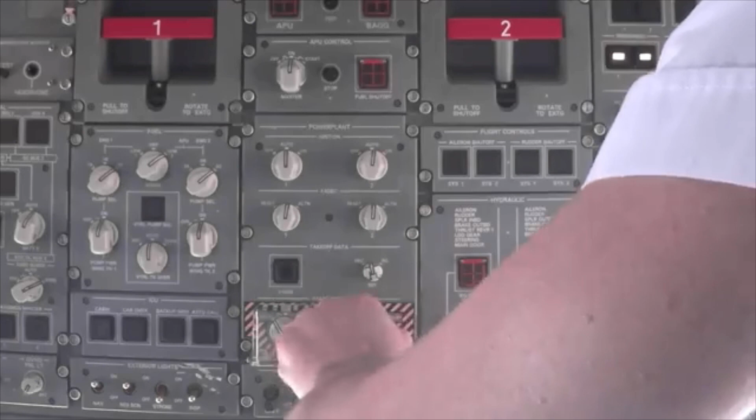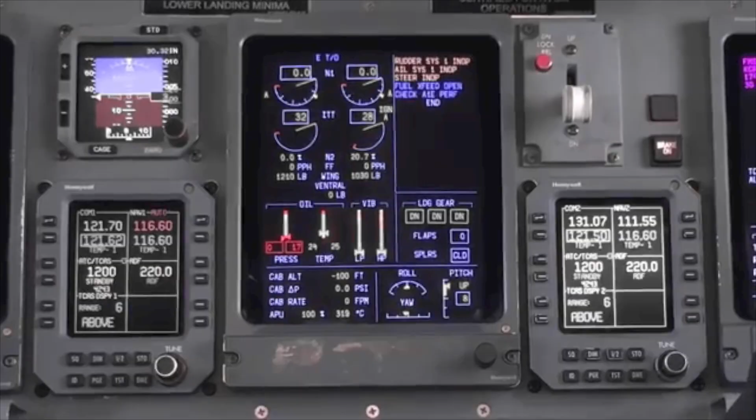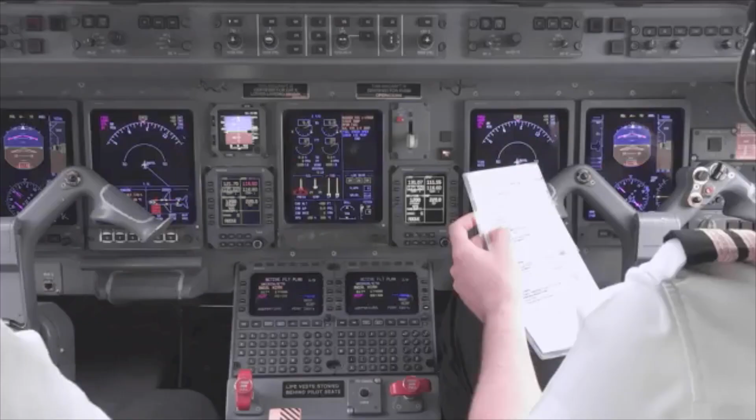Hey, even if you don't want to fly a jet for a career, it would be nice to start a jet at least once, and maybe push the throttle up. Jet engines are usually a lot easier to start than a prop, and the process is pretty simple. It comes down to lots of air under pressure, some fuel, and boom, you're lit.

The tough part is getting enough compressed air. To understand how a turbine engine starts, you should understand how it works. They run off a suck, squeeze, burn, blow principle.

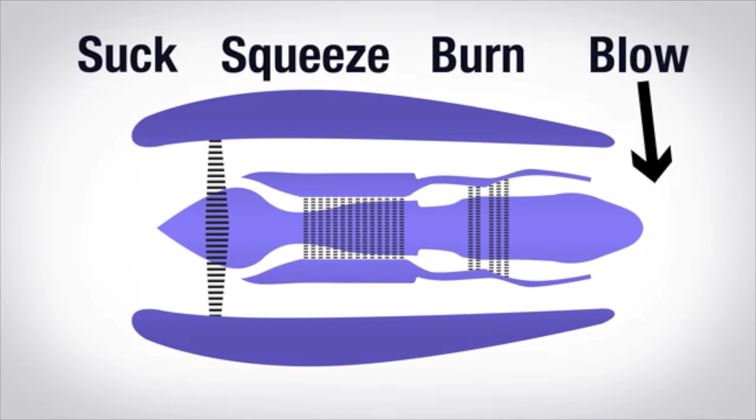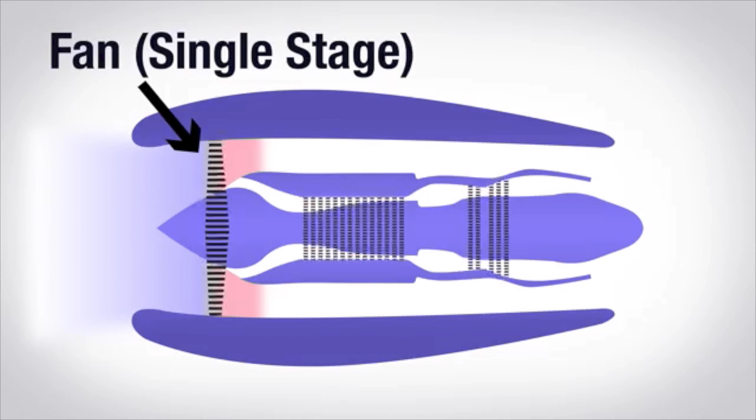Take this generic turbofan engine, like the one that powers the ERJ. It sucks air through the intake, and then it sends the air through a fan, compressing it. In the ERJ, the fan is a single stage, one row of blades. Then, most of the air goes around the engine. This is called bypass air. We use this for most of the engine's thrust and for cooling.

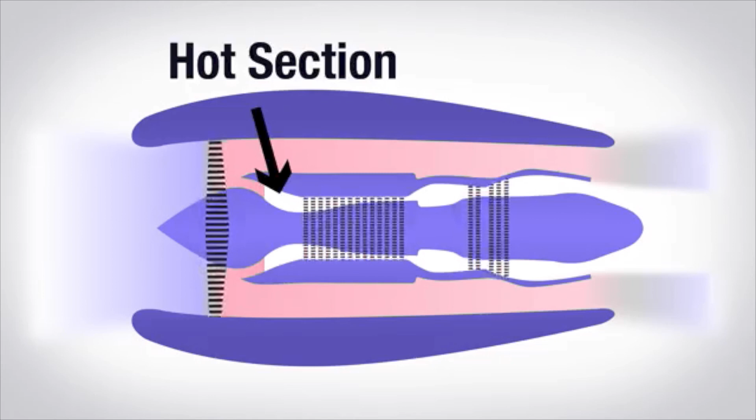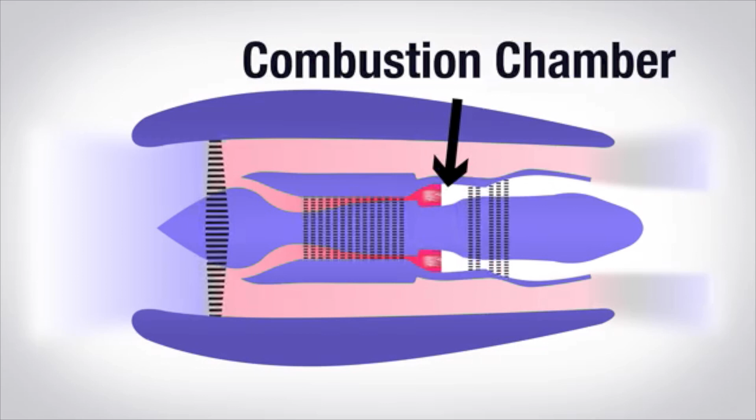The rest of the air goes through the hot section, the part of the engine that burns. Air traveling through the hot section gets compressed even further by passing through 14 rows, or stages, of compressor blades. At the end of the compressor section, the highly compressed air, which by now is extremely hot from all of that compression, passes into a diffuser where it slows down and stabilizes. Then it moves into the combustion chamber where it mixes with fuel, and that's where it burns.

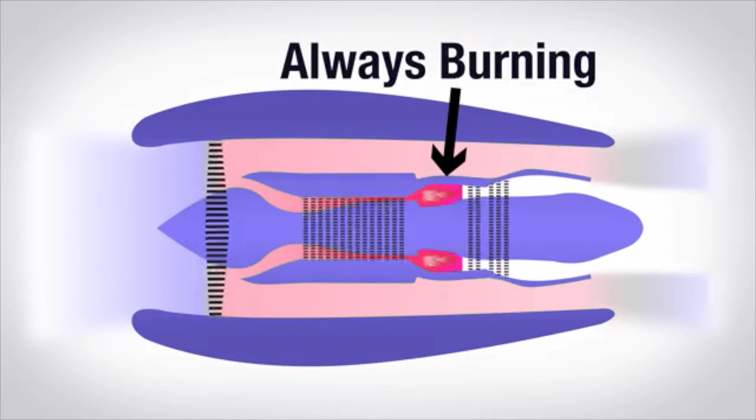Normally, the fuel-air mixture in a jet engine burns constantly, unlike in a reciprocating engine. Some people call this the bang section, but I like burn better because it makes it easier to understand that the fuel-air mixture is always burning. It's not a series of individual explosions.

When the fuel burns, the air heats up, but this time it can expand, and it's forced out through the turbine blades. In the ERJ, there's 5 rows called stages. The first 2 are called high-pressure turbines, and the last 3 are called the low-pressure turbines. The passing air spins the turbines, and that drives a shaft connected to the fan and the compressor blades, spinning them. Then after passing through the turbines, the hot air leaves the engine, generating a little more thrust.

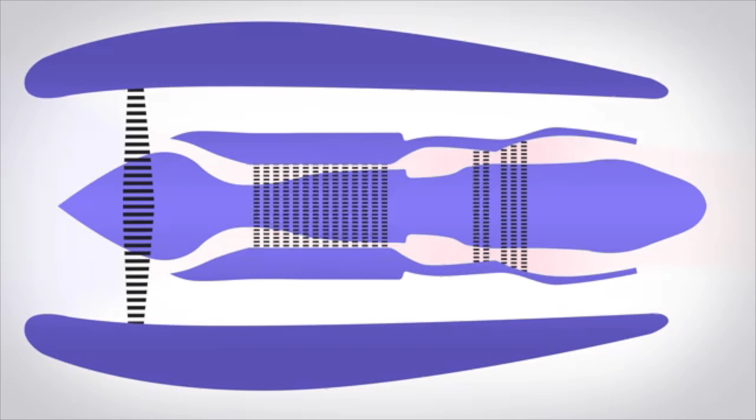So air passing through the combustion chamber needs to be highly compressed to handle all of the fuel that mixes in. If you can't get enough compressed air, you can't burn enough fuel, and the turbine's not going to light. So to start a turbofan engine, you need to spin the compressor fast enough to start pushing compressed air into the diffuser and then into the combustion chamber.

Simple, right? Not so. Jet engines have spark plug-like igniters that initially light the fuel-air mixture, and they keep it lit in turbulent or wet conditions. During a start sequence, the engine core needs to spin at 14% of its maximum speed before the igniters begin to light. The engine's core speed is called N2, and it's expressed as a percentage of maximum RPM. On the ERJ, 100% of N2 is roughly 16,000 RPM. So the engine needs to reach 2,200 RPM before the igniters start firing.

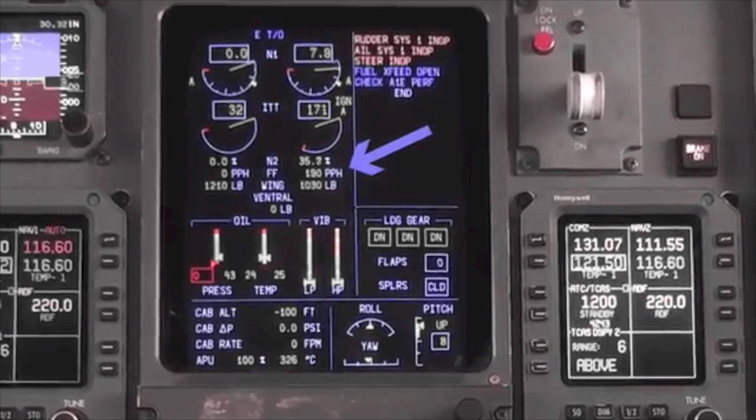So you're not going to hand prop that. The core needs to spin up to 28.5% of N2, over 4,500 RPM, before the engine can introduce the fuel and light the mixture. And when it adds fuel, it does so at about 200 pounds per hour. That's roughly half a gallon each minute. So you need a lot of compressed air coming into the combustion chamber to handle all of that fuel.

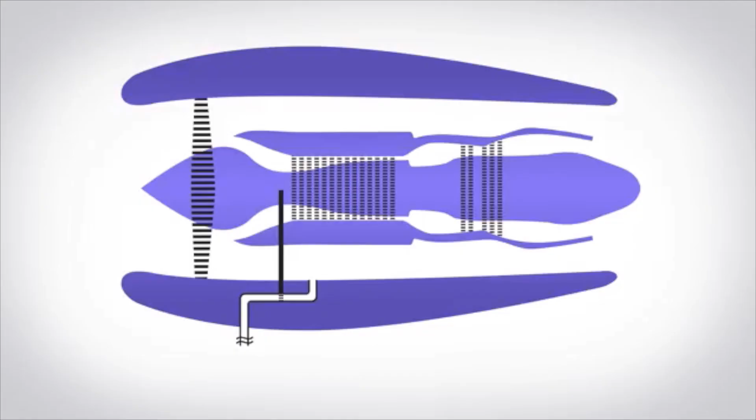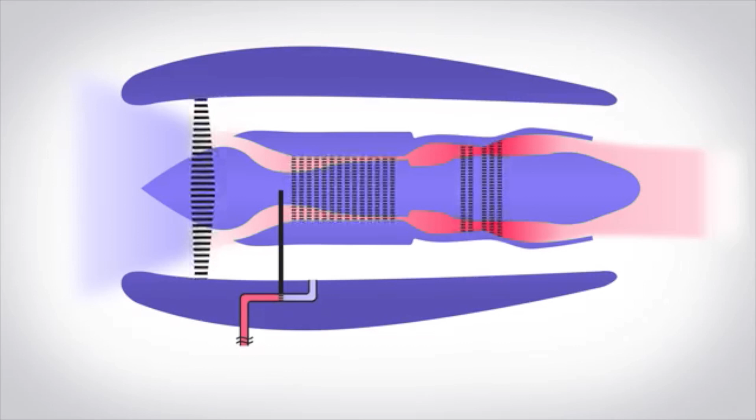Smaller turbines, like many turboprops, are light enough to start using an electric battery and motor. But even a regional jet's engines are too large to start using that electric motor. So instead, we take pressurized air and run it through an air turbine starter. That's another small turbine, and it's attached to the side of the engine. The air spins the air turbine starter, which is connected to the engine shaft through a clutch. So spinning the air turbine starter in turn spins the engine's compressor. And you rely on that system until the engine reaches 28.5% of N2 and it lights. Then the engine powers itself.

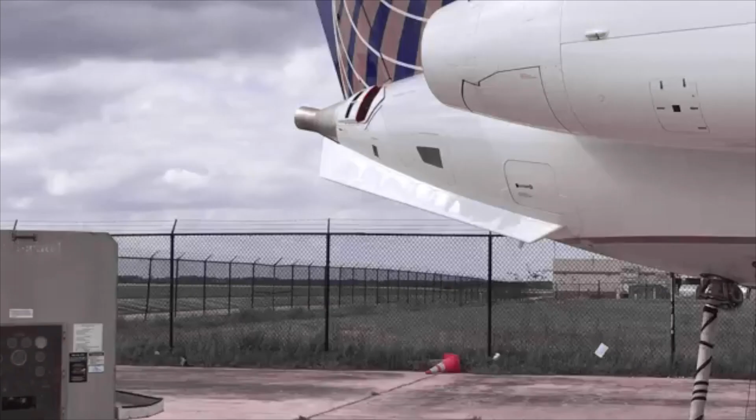So where does the compressed air come from? Well, for most civilian turbines, it comes from one of 3 sources. The most common is the APU, or the auxiliary power unit. It's a small turbine engine, usually located near the tail, that provides compressed air and electricity. It powers the aircraft's electrical systems on the ground, it supplements compressed air and electricity while flying, and it acts as an all-around backup for electrical and pneumatic needs. And it can send compressed air to both of the engine's air turbine starters. It's small enough to start with a battery, so when you normally start the jet, you first start the APU.

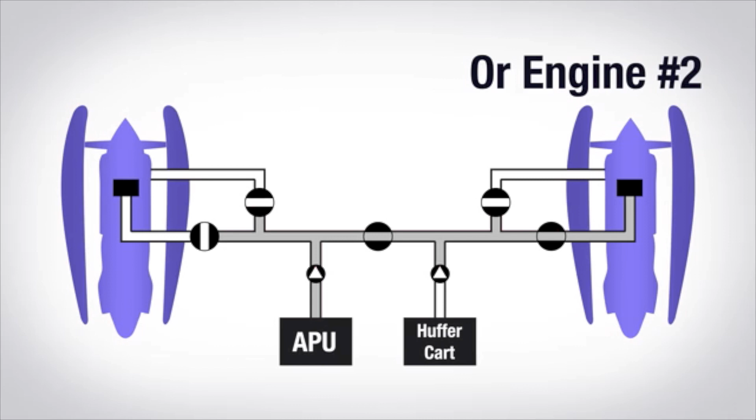Simple enough. But what happens if it's broken? Now, this happens a little bit more often than you'd actually think. In that case, you'll need an external source of compressed air.